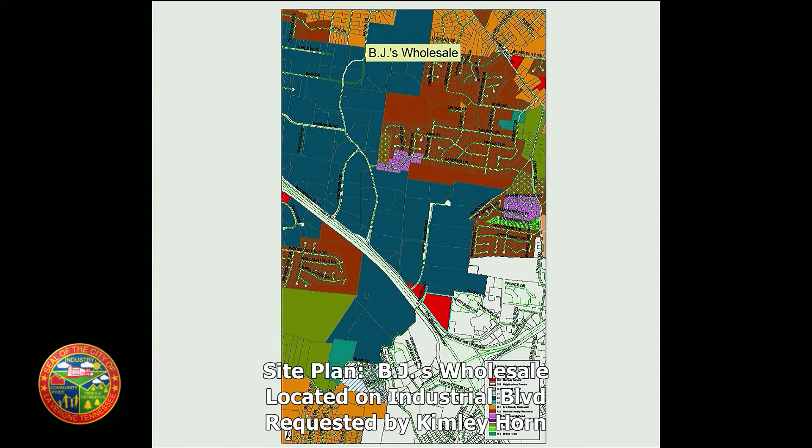You can see there on the zoning map, this red color is the C2 commercial zoning that I mentioned, and you'll notice just about everything else around it is the dark blue, which signifies I2 heavy industrial. So these are some photos of the site. All of you are probably familiar with this site by now. There's some steep rock cuts to the rear of the property that create sort of a cliff, and on top of that cliff is this apartment development, and those apartments are also located in Smyrna. You can see those from the front of the property and the road as you drive by.

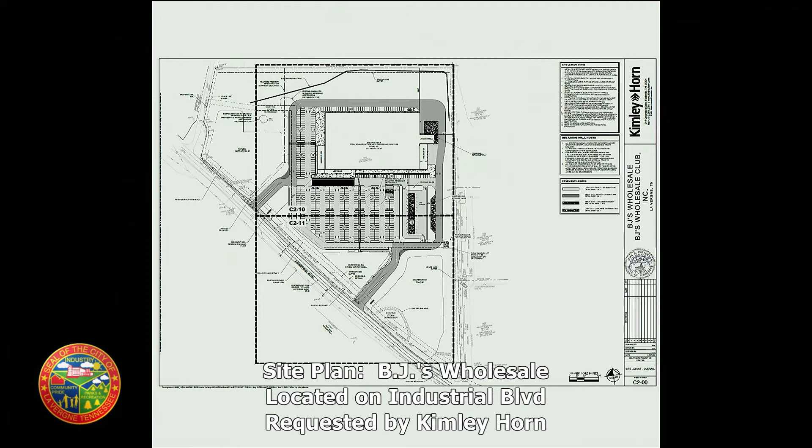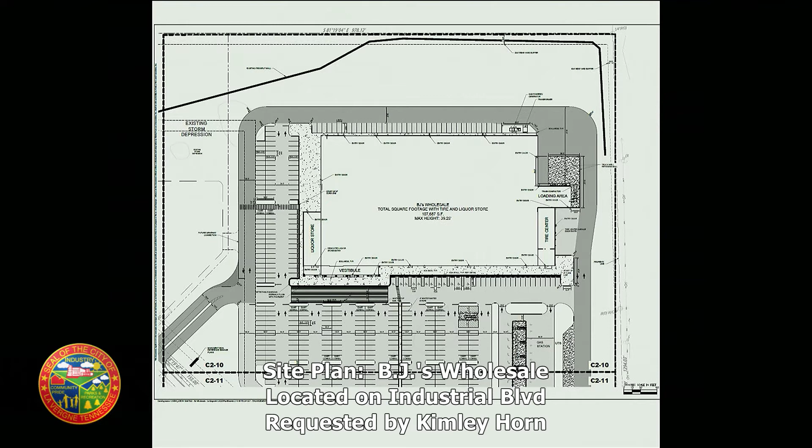So this is the site plan submitted by the applicant. This store is a total of 107,687 square feet, so almost 108,000 square feet. Within the same building, there's a tire center that you've probably seen on the plans, going toward the southeast side of the store. They also are proposing a liquor store that would have a dedicated entrance separate from the wholesale part of the store. This also shows you the detention area and the entrance driveway connection to Industrial.

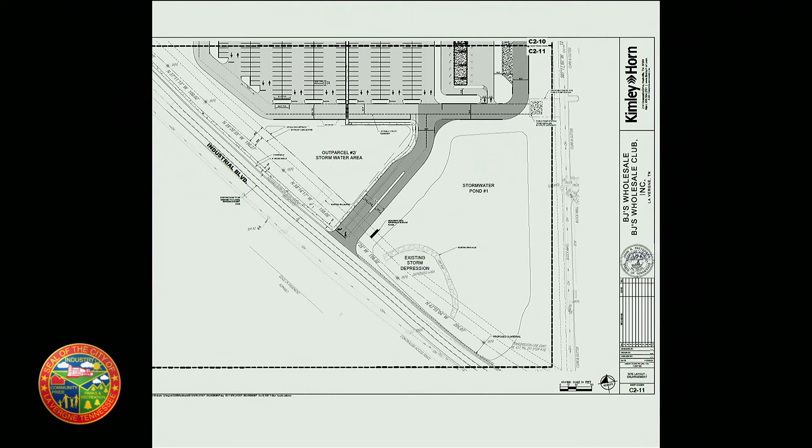There are some areas that we'll discuss in a little bit. The sinkhole area that most of y'all have seen on the plans. I think this was first submitted in November, so there's been a couple deferrals for different reasons, but I know Kyle will get into that with his report. They show right now all the driveways are at least 30 feet wide, and they're providing 460 parking spaces where only 260 are required. So the parking is ample for this site. And there is a materials board that's been submitted. It's at the podium. They're not required to, but they did submit a materials board.

I've left the older plans in here from November in case anybody would like to see those. And the only comments at this point that are left are from the engineering side, so I'll turn that over to Mr. Brown. Thank you, sir. Mr. Brown?

Mr. Brown, please. Yep. Basically, the only technical item they had left was the sidewalk issue because of the sinkhole. At the workshop, y'all had requested that amount be figured, and it totals up to be about 480 feet, so that's $28,800. So if you're okay with the plan as submitted and with the sidewalk fee in lieu portion for that area and the sinkhole, you'll just need to make that in your motion subject to the fee in lieu of $28,800.

Very good. Thank you, sir. Any questions or comments from the board? If we have somebody here from this project, please come to the podium. State your name and address, please. Good evening, Brett Beeler, 6120 Pennsylvania Avenue, Nashville, Tennessee, representing Kimley Horn. Thank you very much. Do we have any questions or comments from the board on this item? The only request I have is, they said you had a materials board, so we can get a feel for it. Very good. Thank you, sir.

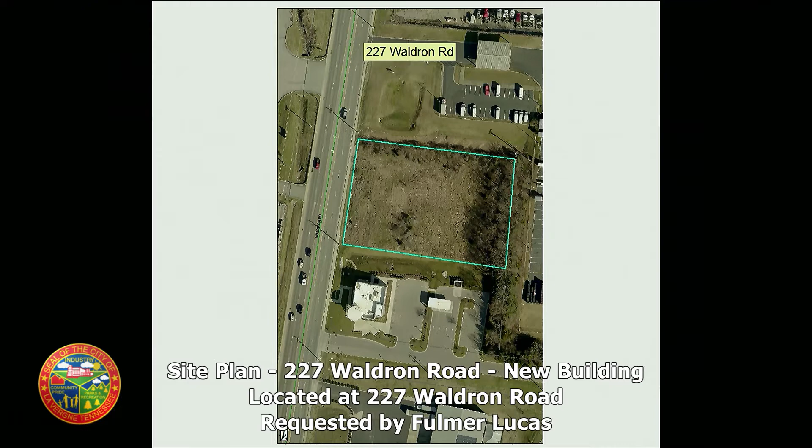This is a site plan request for a retail paint store totaling 9,500 square feet to be built on Waldron Road. And this is immediately adjacent to the Ascend Federal Credit Union location. So you can see here on the screen, this is Ascend Federal Credit Union, and it's the site to the north. So the address of this site is 227 Waldron Road. And on the zoning map, you can see near the top, this red lot, Zone C2, and that's highway service commercial zoning.

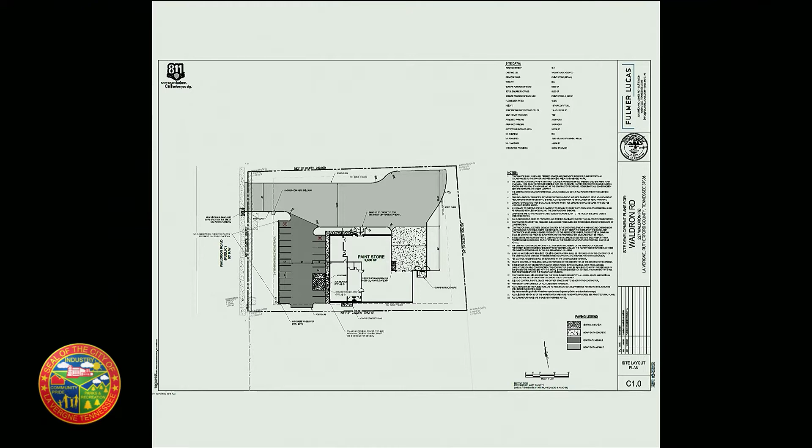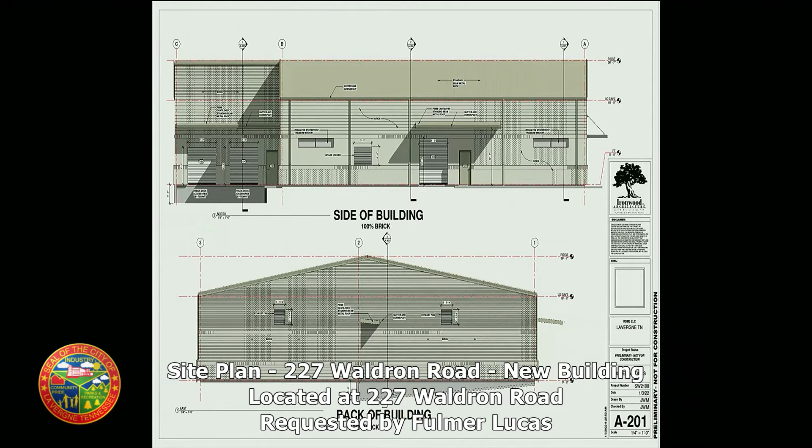So moving on to the architectural elevations, last month they were showing brick on a large part of the building, but there were some areas of metal that were shown. And since that time, they've been working on the architectural elevations. They have now gone with basically an all brick building, and these are the elevations on the screen. And they did submit those as well in your packets, and they're full size in the back of your plan set.

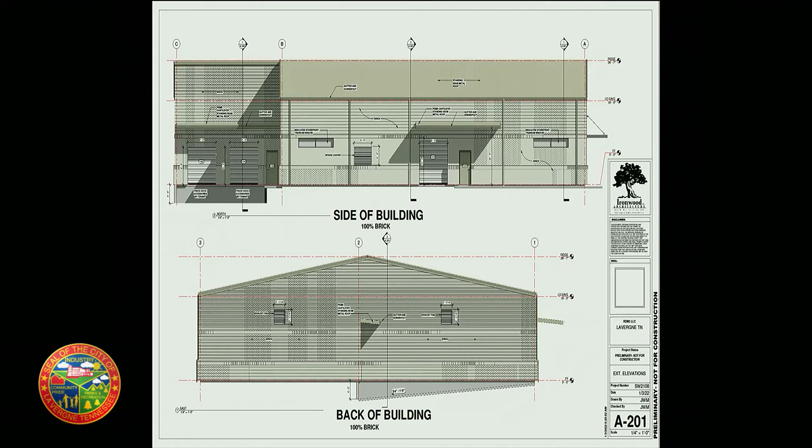So the metal is gone, and they're going with a brick that looks kind of a whitish color, but there is some red. I'll let them speak to that, sort of a mix of the colors. And the architectural comments were actually the last technical comments. This project has also deferred a couple times, so all those comments have been taken care of. And I don't believe there's any left in the report, so I'll be glad to answer any questions.

Thanks. Thank you, sir. Name and address for the record, if you don't mind, sir. J. Fulmer, 2002 Richard Jones Road, Nashville, Tennessee. So the only outstanding comment from the workshop was relative to, it's really hard to get this to print right color-wise, so we labeled it, the material will govern, this board will govern, this is what they plan to use on the building, and I wish it were easier to get them to be identical, but this is it. So if y'all are comfortable with this, then that will have addressed all comments, and we're looking forward to breaking ground. Very good.

Questions, comments for Mr. Rutledge? Does everything they've submitted now meet all the overlay requirements for that area? Is that correct? Correct. All right, thank you. Mayor? I just want to thank the engineer. My understanding is that you, or someone on your team had to hand color most of the... He shares in it, so Chad's here with the developing group out of Oxford, and they share an office with the architect. Had to hand color the architectural materials for us. So I will say thank y'all for that.

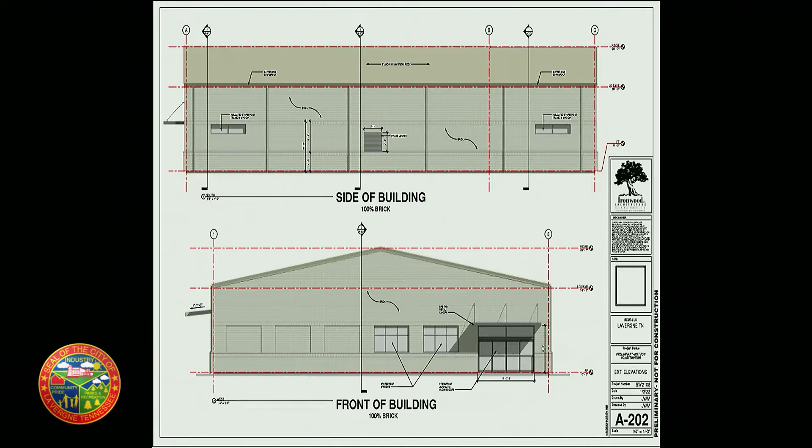Item number 5, Planning Commission Resolution 2022-01, amendment to the subdivision regulations, amend Article 2, Section 2, 106.2, and Article 4, Section 4, 108.5, to refer these fees to the fee schedule that is being established by the Board of Mayor and Aldermen. Mr. Logan, Mr. Brown. Covered that already. Basically we've put together a fee schedule. That's what you had the public hearing on tonight, and we took out the language of what the fee is in these subregs to where it will refer back to the fee schedule adopted by the mayor and aldermen, and that'll be adopted yearly with the budget.

Very good. Do we have any questions or comments from the board? Entertain a motion if no questions or comments. Motion to accept the Planning Commission Resolution 2022-01. Motion to accept by Alderman Coates and a second by Mayor Cole. All in favor say aye. Aye. All opposed? Motion passes. On to our next item.

Item number 6. First item in new business. Site plan, Jones Boulevard Industrial, new building totaling 84,000 square feet on 7.25 acres, requested by Kimley Horn, property located on Jones Boulevard and Bain Drive, tax map 17, parcel 7.01, I-2 Heavy Industrial Zoning District, property owned by the State Street Group LLC. Mr. Logan. Thank you. This is a request for site plan approval for a new building totaling 84,000 square feet to be built on Jones Boulevard.

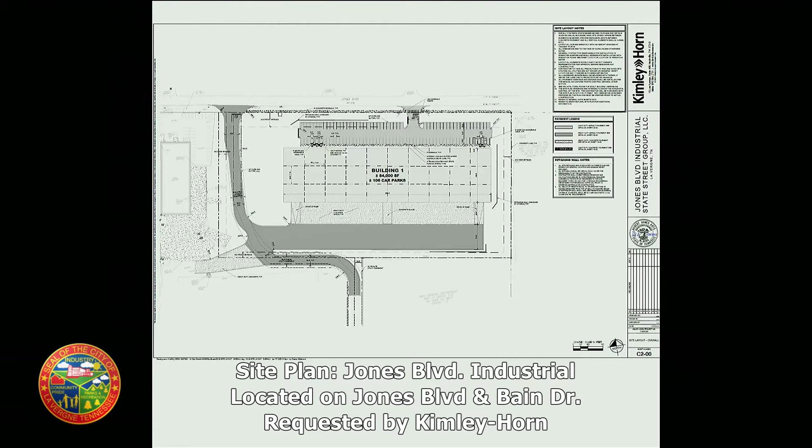There's the site plan on the screen, and you can see the parking would be along the north side of the building. And pretty straightforward distribution and warehouse type facility. And a little bit closer look, you can see what they're proposing.

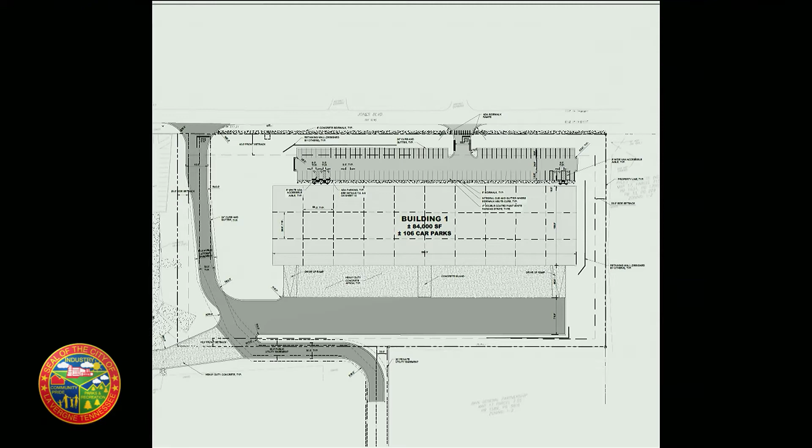And this site has also been, well, the Plat, at least, has been before you all before. And so that's the next item on the agenda. But this site plan and the Plat go along together. And they are providing right at 106 car parks, which is well within our ordinance. So there's plenty of parking that's being provided. And there's no other comments left outstanding, so that completes the report.

Thanks. Thank you. Is there a representative here this evening for this project? Thank you. Please state your name and address for the record. Deaton Hildebrand, 2127 Melody Drive, Franklin, Tennessee, representing Kimley Horn. Thank you, sir. Do we have any questions or comments from the board? No? I do appreciate you addressing the 10 staff comments and the one item on the 30 feet. I appreciate that. And with that, I'll make a motion to accept as submitted.

We have a motion to accept by Alderman Coates. Do we have a second? Second. Second by Mayor Cole. All in favor say aye. Aye. All opposed? Motion passes. Thank you.

Item number 7, final plat re-subdivision of 141 Bain Drive, one new lot on 7.25 acres requested by Kimley Horn, property located on Jones Boulevard and Bain Drive, tax map 17, parcel 7.01, I-2 Heavy Industrial Zoning District, property owned by State Street Group LLC. Mr. Logan. Thanks. So this is the same site as we talked about in the last item.

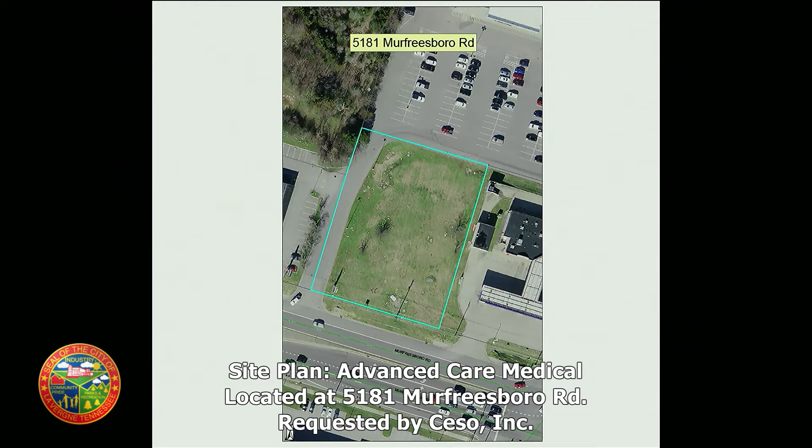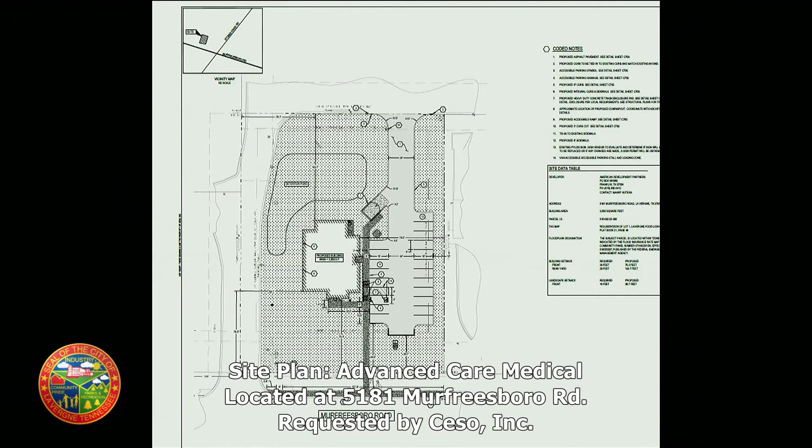And this is a site plan that was approved in October, so about 3 months ago. And you see, pretty simple in and out with the point of connection back at the parking lot for Planet Fitness, and no direct connection to Murfreesboro Road. And then this is what I call the L-shaped plan. So you've got the same connection point at the northerly end of the site, and then a new connection point to this driveway that runs beside the Mexican restaurant. But still no new access to Murfreesboro Road.

So these are the two plans that were submitted. That's the approved one, and that's the L shape. And the applicant provided this one in your packet tonight for you to view. And of course, all of this stems from some fire issues. I'll let someone else speak to that. Thanks. Thank you, Mr. Logan.

I can pick up on where we are on this. Basically, like he stated, we do have an approved plan on this. Once it got further into the review of building plans, et cetera, it was noted that there was an issue with meeting the fire code, and the current plan as approved does not meet the fire code. So we had worked with the applicant to submit us at least a plan sheet back to discuss, getting something in front of y'all that does meet the fire code.

But basically, in your packet, you'll have the drive that is added. We'll have two painted arrows on the pavement to delineate that it is a one-way drive. There's going to be two signs, one on each side of the entrance closest to that north-south access that goes into Planet Fitness, basically one-way drive signage. That's on your plans. They added a stop bar. If you go to the right of the crosswalk from the sidewalk, there's a stop bar that will be painted on the pavement, and two signs on each side of the drive that say "Do not enter."

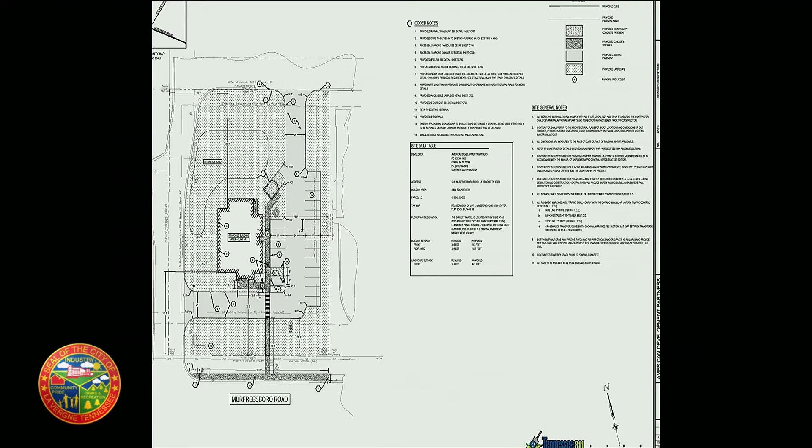I did bring up that the board had said angled spaces would make it more of a forced one-way because of different driving habits. They had preferred to leave it at 90 degrees. Some people prefer to back into spaces as opposed to pulling in, and angled spaces would eliminate the possibility of backing in. Some people think that is safer than pulling into spaces. So they had preferred, if this board is okay with it, to satisfy the fire code with what's submitted in your packet, the L-shaped drive with the signage and pavement markings stating that it's a one-way drive. We all know somebody may not follow that, but it's at least trying to get it to be one-way. And they had preferred to leave the 90-degree.

If this board does not feel willing to approve that, they'd at least request deferral to discuss it at another workshop. But hopefully, the board will be okay with this layout. I know it's not what everyone on here wanted, but this does meet the fire code. And Curtis can discuss the fire code issue if you've got questions on it.

If you would, please, Mr. Curtis. So do you have any specific questions as far as why the accommodation needs to be made? I know Chief Beasley was here during the workshop. Unfortunately, I was out with COVID. Yes, sir. And I think he told me he tried to answer as much as he could. And he did a wonderful job. So if you could just give a brief summary as to why we have to have the other entrance. Yeah, absolutely.

So the fire code states in Appendix D, as far as approved fire department apparatus access, anything that exceeds 150 feet must have an approved fire department turnaround, for multiple reasons. One, for tactical, and two, for safety on operating fire apparatus. You start backing those up, extended lengths, it can become a hazard.

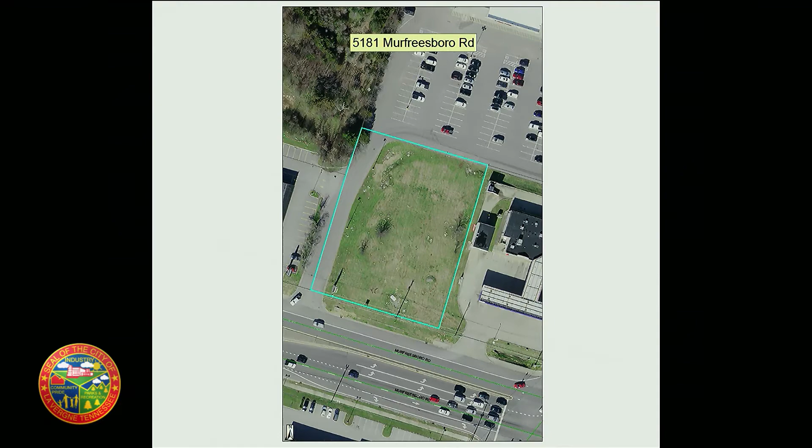Very good. Thank you. And I would like to point out also on that, Bo, if you could go back to the aerial photo. This was pointed out by the applicant today. Of course, they did their due diligence and looked into this already. Not going to get into what their legal says, but it is something you can see on the screen right here. If you look at the private drive going into the site, Planet Fitness is already going across this applicant's lot to get to their building. So they're already crossing each other. Just wanted to point that out.

Thank you, sir. Any questions or comments from the board on this? There is no applicant here this evening for this? No, we told them not, with the situation we had, since they had already come to basically about 6 meetings because of deferrals, that since this was something on our end, we would only ask that they come if it came to a point where the planning commission couldn't approve something. Very good.

With the property situation, I kind of would like to talk to the applicant a little bit about the map, just one or two things, even though it looks great. Does the board feel we possibly should defer, or at least give them an opportunity to get that resolved? For myself, I'm fine with it. I listened to the meeting. I know I was out with COVID myself, but I listened to the whole meeting. I'm personally satisfied with the changes, and I know the access issues are between the two. So I would make a motion to approve as submitted. I will entertain a motion to approve as submitted.

I have one question before, discussion. I want to second, but this right here is going to override what was originally adopted, right? Do they not have to resubmit a whole new plan with everything showing landscaping and lighting and all of that stuff? Or is this going to be sufficient? We'll get the rest of the sheets. They'll resubmit a full plan set that reflects the changes with the drive. So do we have to approve that, or am I approving that blindly? You'd be approving this, and where it's grass, it will turn into pavement. If there's any trees or shrubs, we will adjust those accordingly.

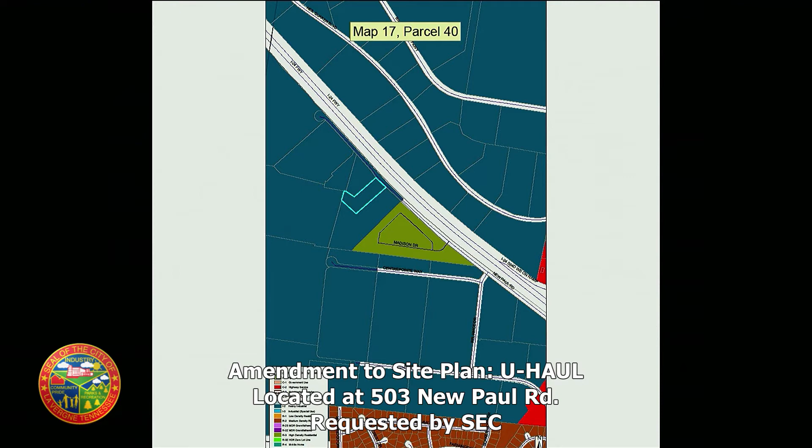Thank you. So this is a site plan amendment to the U-Haul site that was approved in June of 2019. On the screen is a zoning map, so we're talking about this highlighted area here in the blue outline. So this is a pretty solid area of heavy industrial zoning, except for the one apartment site there on the screen, which is that green triangle. So this is kind of the 30,000 foot view, but this is I-24. So Smyrna's to your right and down southeast.

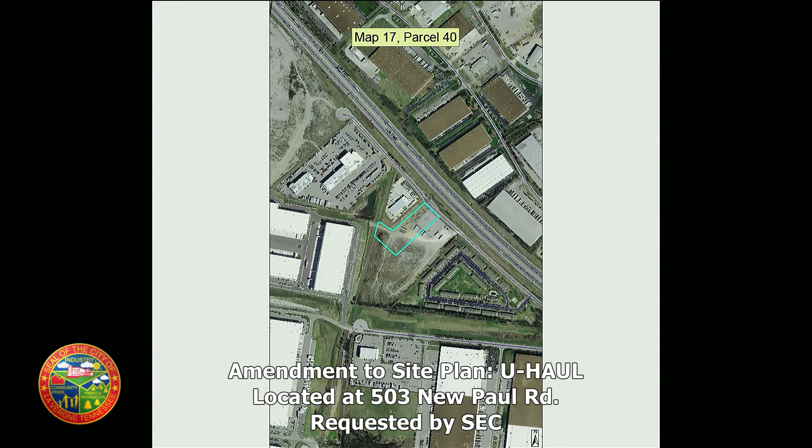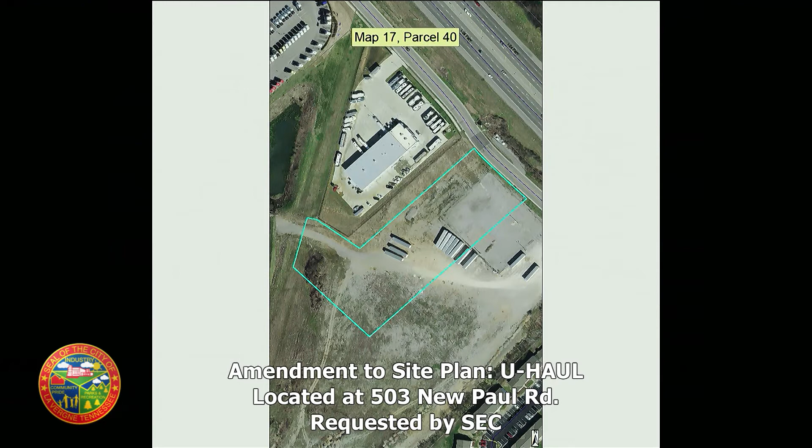This site is outlined here in blue, and the neighbor to the north back in 2019 was Olympia Coach, but now Olympia has been bought. That property has transitioned into Southern Tire. So on the next shot you can see the Southern Tire building is here, and then Volvo is the next property up. Anyway, this is the site as it looked before construction, and this is a photo from 2019 before the site started construction, and then contrast that with today. This is what it looks like today with the building that's there.

And of course, there's metal on the exterior, which is an issue because it doesn't meet the overlay requirements. But this is the new construction, and then this is the rear of the lot as it appears this month. It has been striped, and you'll notice in my report, the original site plan called for at least 5 buildings. There would have been the large building that I just showed you, which was to be a 3-story building, and then 4 1-story buildings. And U-Haul has since decided to not build the 4 in the back, or to do them at a later date.

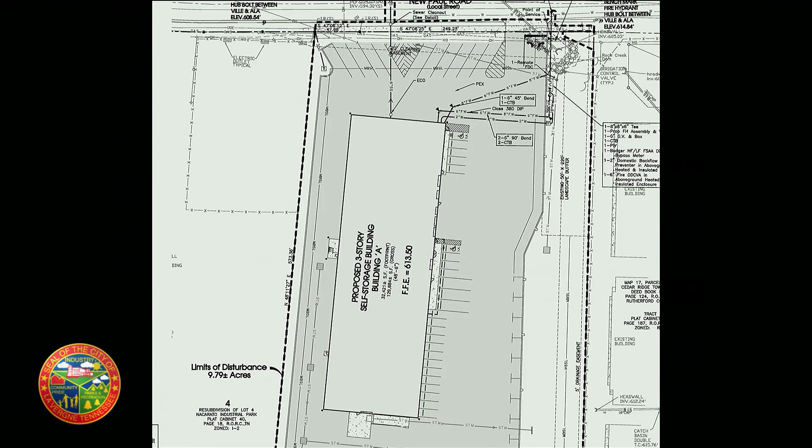So, of course, they've approached the city trying to get a CO, and it doesn't match the plan from 2019. So that's why it's back here tonight. You all saw them 2 weeks ago at the workshop, and you probably remember the discussions from that night, and a lot of that was about the architectural elevations. I want to show you, this is the plan that was submitted for the June 2019 Planning Commission meeting. So this is what was approved. It's a pretty deep site, so they're showing you in 2 sections. So that's building A, which is the tall building, and then this is the rear.

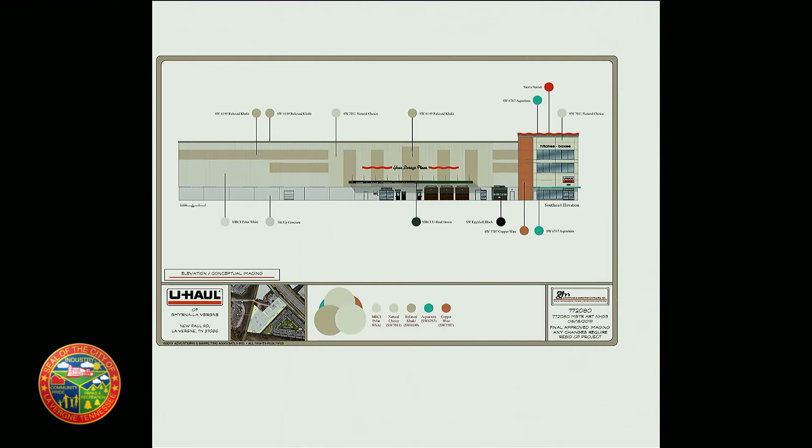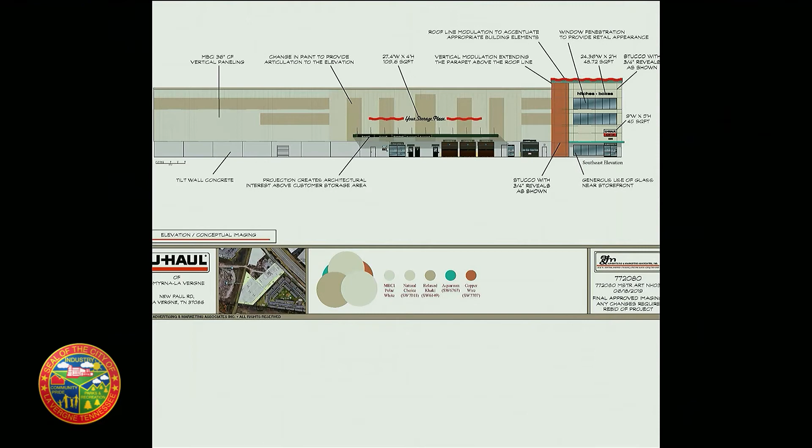And you'll notice on this plan that there are a lot of covered areas indicating they would have built some type of parking structures that would have covered the parking spaces. So that has also been changed. I'm just kind of outlining all the changes that have occurred from 2019. These are the original elevations that were submitted and ultimately approved. And you can see there's several mentions of stucco. So this is a stucco with the leader line pointing toward this vertical element. On the next one, here's more mention. So 2 leader lines here.

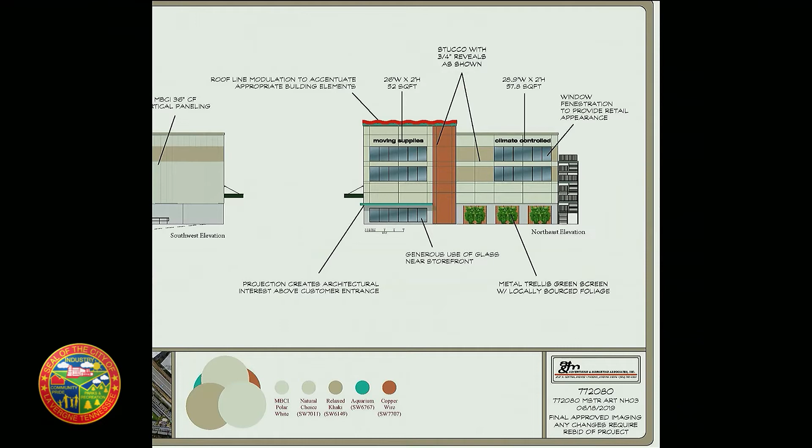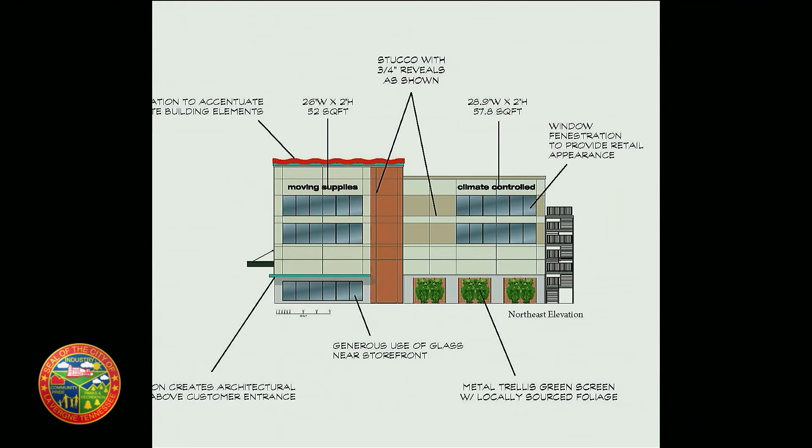You can see this dark color, which is orange today. Doesn't look as orange in this image, but that's supposed to be stucco. This darker beige color is supposed to be stucco. The lighter colors, basically everything at the front of the building extending back to about 250 feet was supposed to be stucco. So these are the original. And there's one more shot at the original elevation that was approved. And one thing that stuck out to me when I reviewed the set that's in your packets is

we specifically had a discussion about this diamond pattern and the diamond branding, and the Planning Commission was very specific that month that they did not want it. So U-Haul took that off, which is one reason it's not out there today. However, it showed back up in this plan set, which it shouldn't be in there. And I've got several comments in the report about why is the diamond clad back in when you all very explicitly said don't put it on the building, but yet they submitted this set with them on there. That's a bad oversight on their part, I'll say that. And it should have been corrected. So if you've got questions about that, so do I.

The other sheets that say preliminary, there shouldn't be any preliminary sheets. I mean, this is a voting meeting. So those are my other comments. They shouldn't have any preliminary sheets in the plan set. That's what workshops are for. I don't know why they're in there. And I've not had any contact from them to tell me what their intentions are.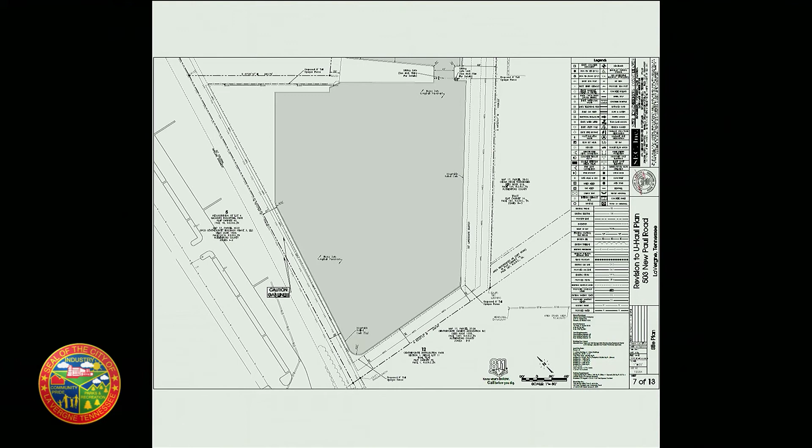But at any rate, this is the rear of the lot. So it's showing up in your packets, same as this. It's just a blank slate. So not exactly sure the intentions there. There is striping. If you go out there tonight, you'll see the striping. So I don't know why something didn't reflect on this sheet, but these are renderings that were provided, and again, here's this diamond pattern that's showing up, which you all had already rejected in 2019.

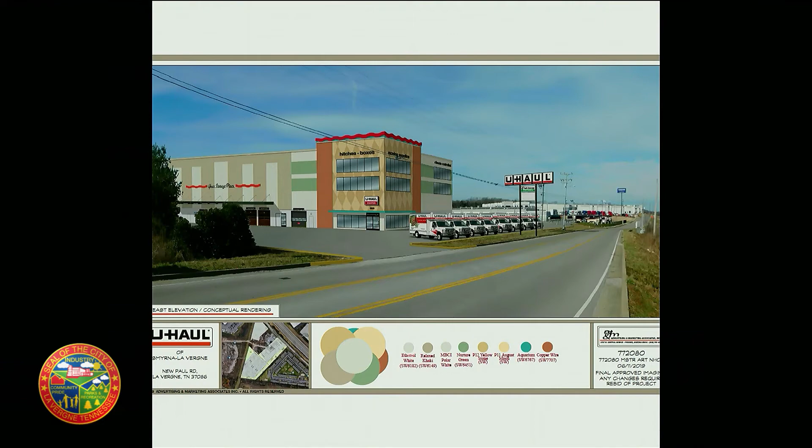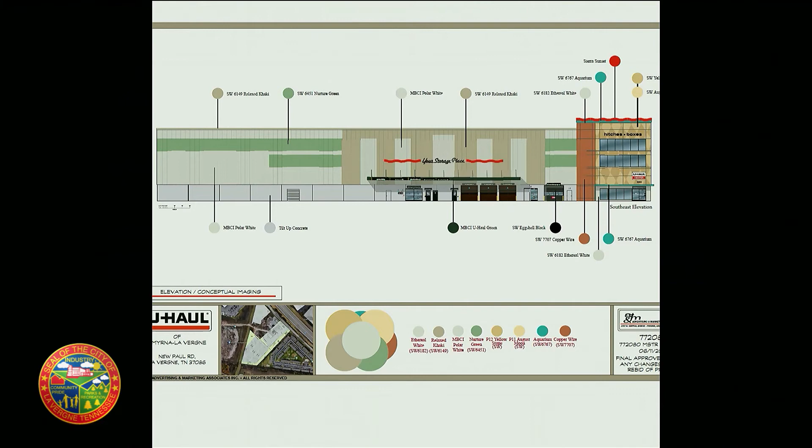So that led me to believe that this is just a prototype, that they just stuck a prototype in the La Vergne plans, which is not helpful for fixing our problem. I mean, the problem is to get the building fixed like you all want it, but then they went back to this cladding in this rendering. So those are way off. I don't know why they're in the set. Again, there's the diamond pattern. I can only assume it's a prototype that is stuck on every U-Haul across the United States, because I don't have any other way to explain it.

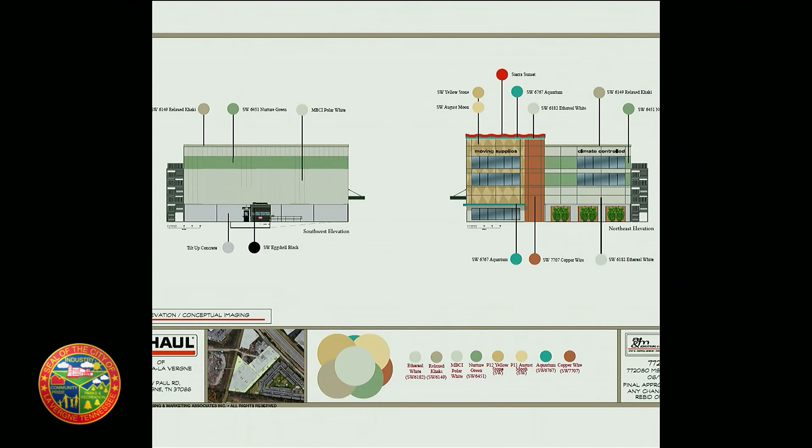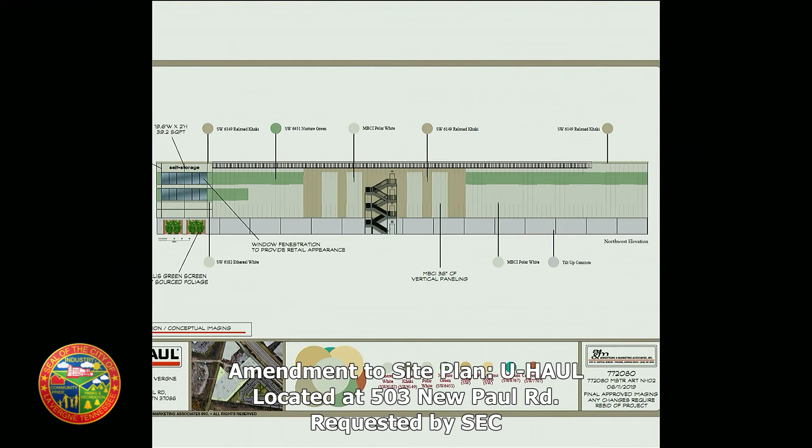So these are what's in your plan set tonight. This is all four sides, north, south, east, west. And then you can see some of the fire escape steps, and there is tilt-up concrete, this bottom layer. If you've driven out there, you've seen it. That does match these plans, but that would be probably it. There is this tilt-up concrete, and it's called out from the 2019 set.

So, along with all the changes that they have proposed, especially in that back area and the buildings that are not being built, those, along with the architectural comments, are what's left to go over in the report. And I think that pretty much sums it up, so I'll be happy to answer any questions.

Thank you, Mr. Logan. At this moment, I'm going to excuse myself from the remainder of the meeting and turn it over to my vice chair. Everyone have a good evening.

Do we have a representative here tonight for this? You can state your name and address for the record, please. Zach Wolpart with Site Engineering Consultants, 850 Middle Tennessee Boulevard in Murfreesboro. So as for the elevations, I believe the wrong file got mixed in. This was an old file. Unfortunately, I was out the week this was submitted because of COVID. So I believe the wrong file got uploaded. This is not the correct elevation. We will have to correct that.

As for the striping in the rear, what the photo was is at the back of that large building. That is just a laydown area. The striping that was shown on the old plans was for RV parking, which is not striped today. That striping is not there today. I think you got the location confused on that photo. So go right there, down below, up, that one. Right below that building, there's striping on the plans. And that's what that photo was of.

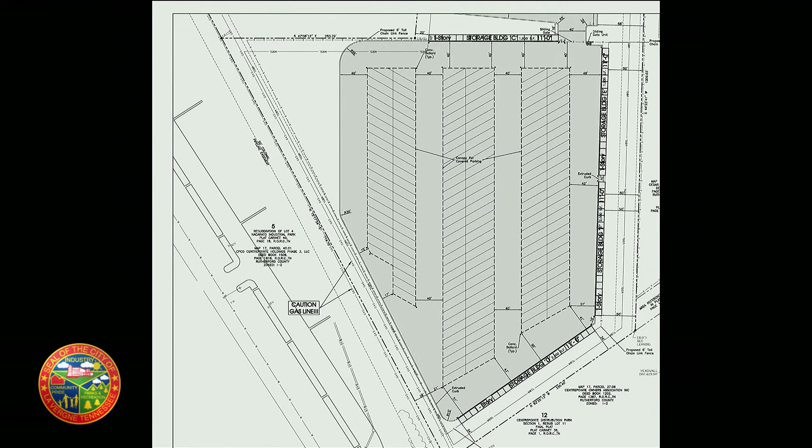Hey, go back to that, one more, Bo. No, other way. That. So you're telling me that's removed? That is removed. There's no striping. So that was in 2019? Right. And you're saying that's no longer going to be there? That is no longer going to be there. It's just a paved, flat area right now. There's no striping. Those small buildings are not there, as is reflected on the plans today. Madam Chairwoman, does the applicant plan to get fully in compliance with the overlay district? Yes, the stucco will be put on the front, over the metal paneling.

It will be not the colors that are shown on the elevations you have in front of you. It will be reflective of these ones that are on the materials boards. Those elevations are correct. So I have maybe a different but same question. Do all of your revised plans plan to meet every single overlay district in that area for that building? Yes. Yes? Yes. At this point, since this is a voting meeting, though, that doesn't really matter.

We don't have them in front of us, so probably a deferral is gonna be... Well, that's what I was going to make a motion. That's something that someone can make a motion and vote on. For me, and this is another question with me, because originally you are wanting to subdivide it, but it's really just a site plan amendment. Why come back? Why didn't this occur at the very beginning? I know you are wanting to get into this building as quickly as possible, but we have one set of plans, and then you come back later on to change that, so.